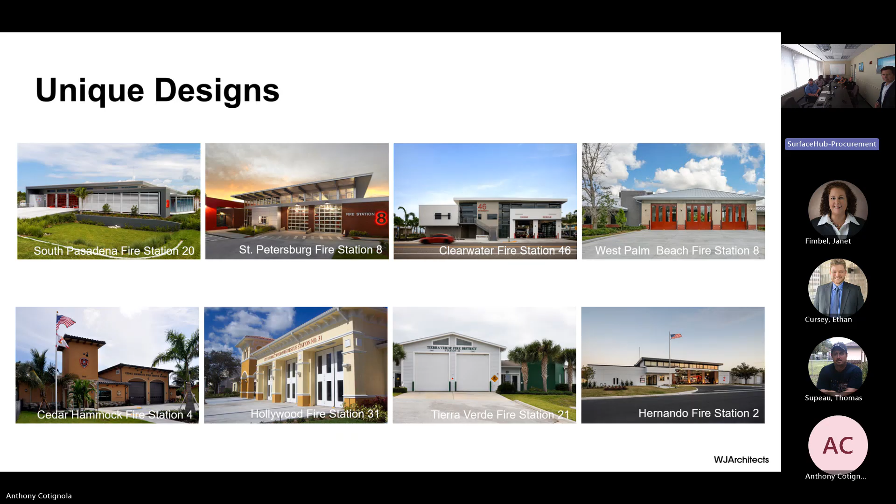From a LEED standpoint, unfortunately, LEED and resiliency tie together, and we've been tested recently. This is the Pasadena station that was used to launch boats during the last storm. And then we have Fire Station 46 directly on the beach - they were up and running about 3 hours after the stormwater receded.

They called it the Community Rock. We did one of the first LEED Platinum buildings in the state of Florida, and so many of our projects have gone for LEED, Green Globes, etc. We take pride in the building actually performing beyond LEED - LEED is just the base design, in my opinion. A building, if it really is sustainable, will look sustainable. The materials should not need to be painted; it should be low maintenance, which actually helps you guys out in the long run.

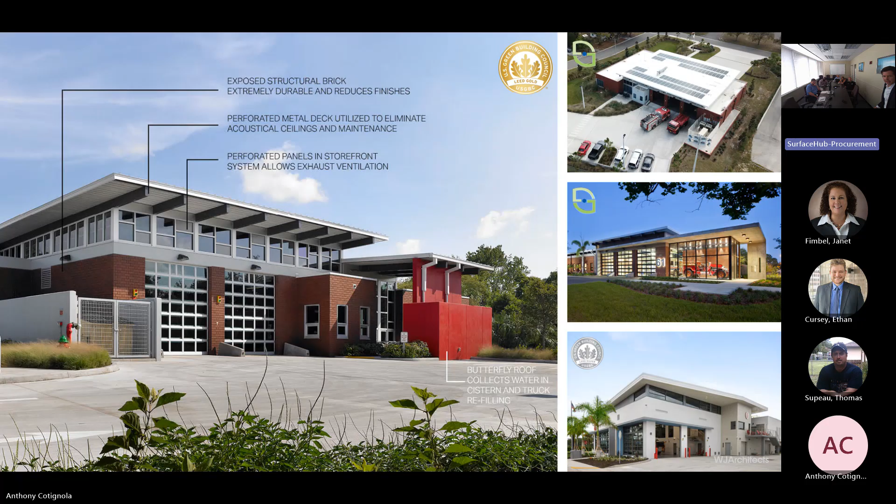Photovoltaics, we put those on. Even this roof collects into a cistern, and then we're able to use that on site. All of the natural light in the facility means you really don't have to turn the lights on during the daytime, and we just control that within the dorm rooms.

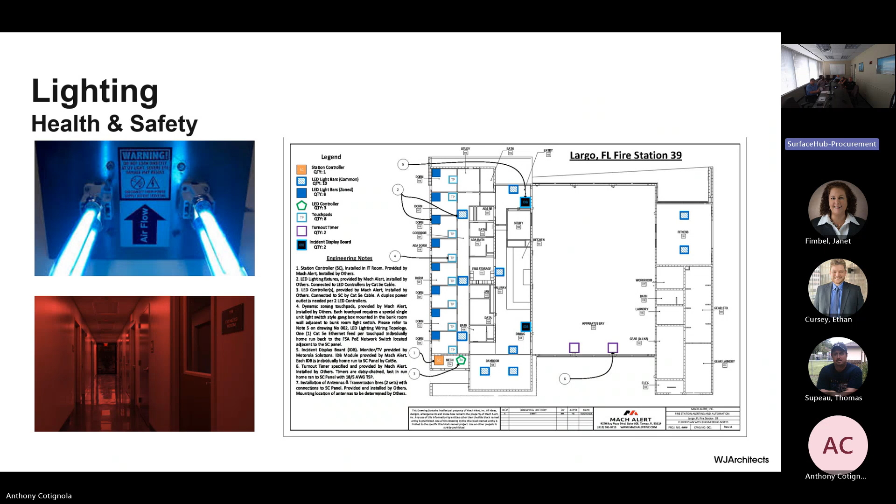Just as important as lighting, we approach it in a lot of different ways, both from Mach Alert or Phoenix or Locution alerting systems. We've used most of them throughout the state, depending on the municipality. But also for health and safety, we like to incorporate UV lighting in the ducts to help kill any airborne bacteria and mold, as well as lighting that adjusts to the eyes of the firefighters. So when they do get a call at night, they're not blinded by light, and it helps with sleep deprivation, as well as no one tripping on things when they're going to the apparatus. So we think of the whole buildup from alert, building up all of the lighting systems as you go in.

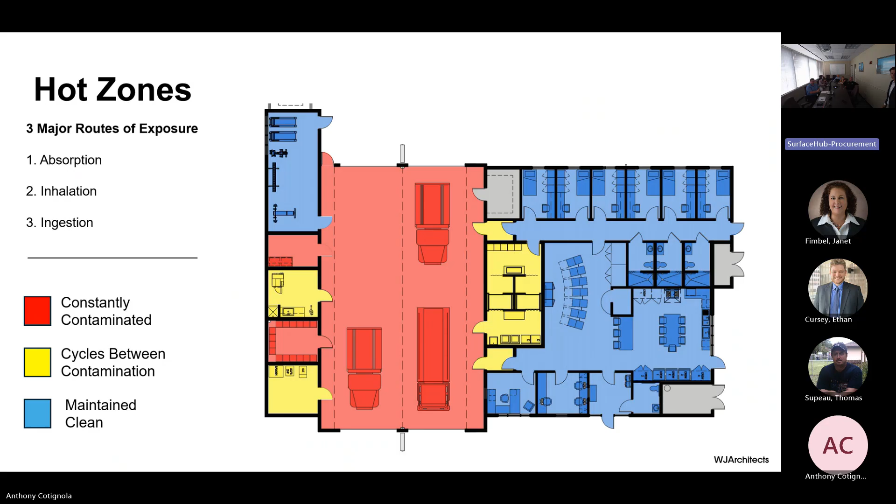Zone design, cancer prevention is huge now. We are starting to realize that you have to separate contaminated areas from living areas. To do that, we've started to implement vestibules, airlocks, and decontamination routes in and out of the clean spaces to the contaminated spaces. So you see the red would be constantly contaminated, yellow would be cycled between and cleaned, and that would help keep all your living spaces clean and free of toxins.

Zooming in on that, here's just a snapshot of some of the materials we use. We've implemented successfully the SpectraGlaze ceramic face CMU, which actually cuts money on install because they adhere the ceramic to the CMU and then install it all at once and basically just grout over it. Very nice looking, and you don't have to paint or seal it.

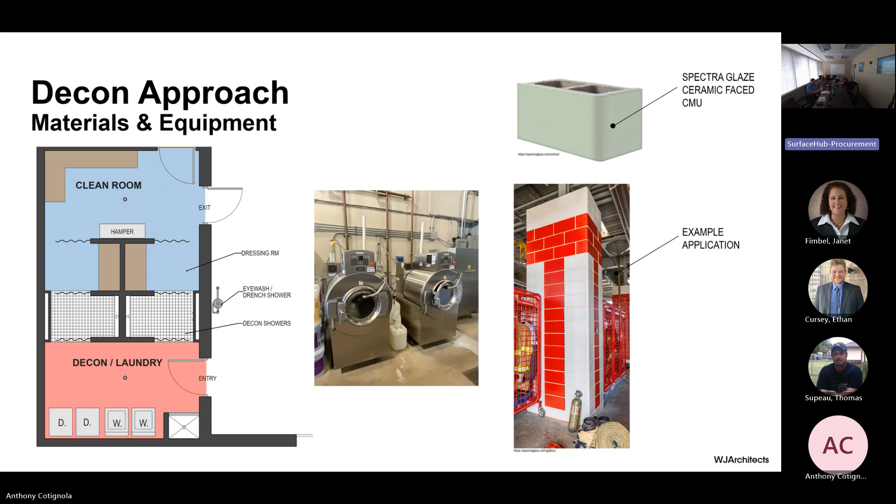Extractors we put in just about every station, so we're very versed in those. And then this is kind of a zoom in of that decon route, where you have these separate showers where you can move through to a clean area before you enter into living spaces with food, clean and everything else, to make sure you keep these separate areas.

Materiality also huge. We like to make sure it's maintainable so your guys can do other things more important, like training. So yeah, how many ceiling tiles have you replaced?

Right, we don't like to use drop ceilings if we don't have to. We use this Epicore deck, or different types - this is the name brand, but it is what you see. It's structural, plus it has an acoustic performance element to it, and we can use it in the apparatus bay or in the living spaces.

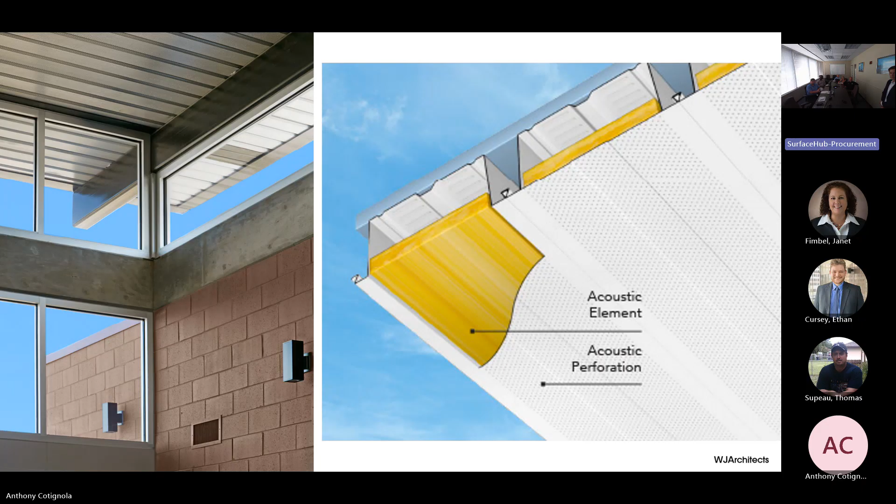You can see we have a CMU brick unit that doesn't need to be painted. We did go visit Station 45 - we saw that reference when we did some research. We wanted to see some of your other stations to make sure we were keeping up with what your standards are, so we took a tour. Very nice gentlemen, they showed us around. We just did kind of a comparison to that and what we're doing now.

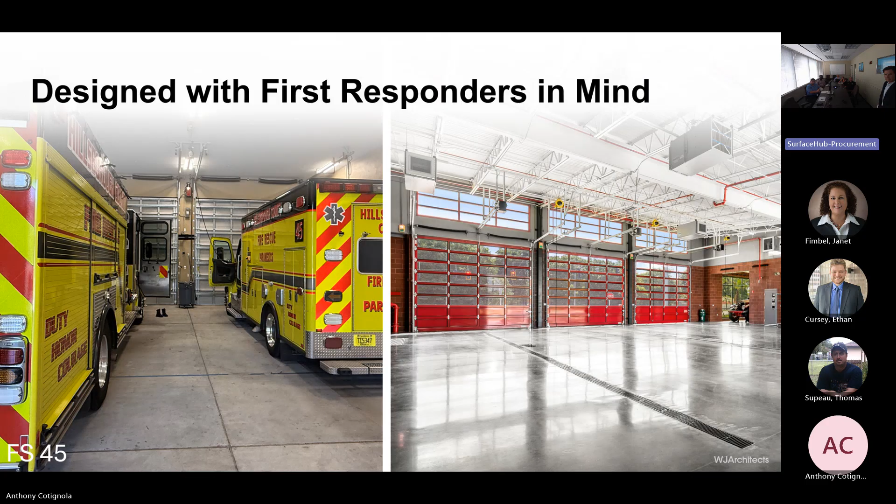We noticed we typically like to do the trench drains. It's a little better for collecting, and then you don't have as many slopes to worry about. Polishing it also is much easier to clean than trying to clean a broom finished surface. We've found that it's been very successful in the current stations.

We also have the air hog exhaust removal system, and we can talk a little bit more. Right, there's a kind of example too.

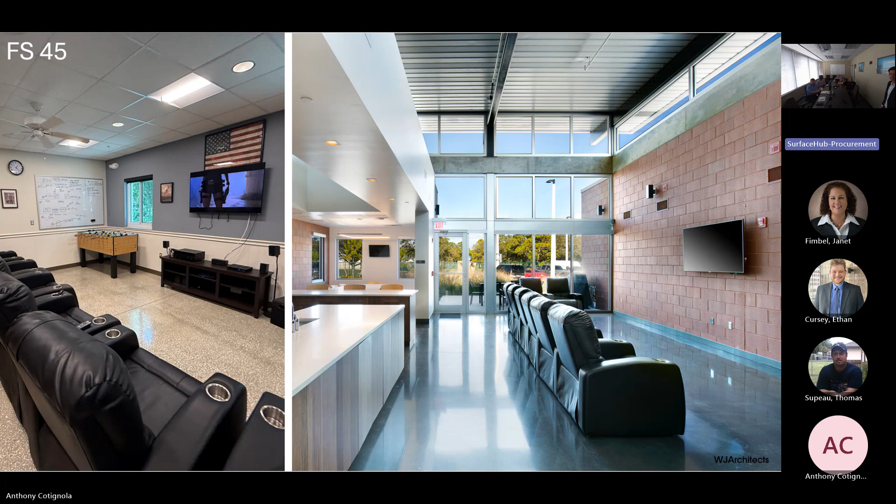Basically, if you go back to one of these stations, it's not changing - ten years later, it still looks the same. It's just an example of how we do our interior spaces. This is the kitchen, a very used spot. Again, very clean, polished concrete with quartz.

Next is Clearwater. You can see how we do our pantries - we like to put everything in a lockable pantry, including the refrigerator. That way it also cleans up your space a lot. But we all know firefighters will share food - they won't take anything else, obviously, but food's up for grabs.

As an example of our dorms, same kind of concept, same materiality. We have that brick wall exposed, so you don't have to paint that as well.

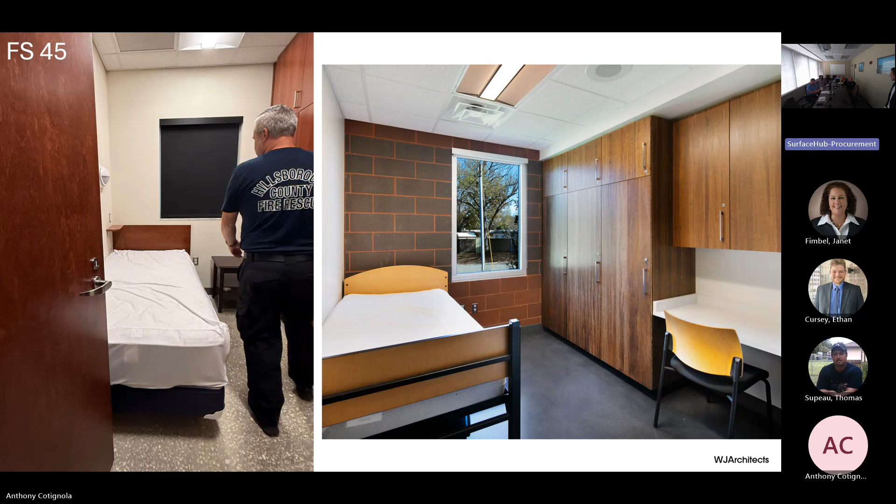Even the space underneath the bed has 3 drawers for additional storage.

Here's one of our bathrooms in Pasadena that we did. We like to do floor to ceiling tile, and our cost per square foot remains the same. It looks expensive, but it's really not, we have tons of reps we go through. You can actually have a hose bib in it and hose down the whole thing because it's just all tile and concrete.

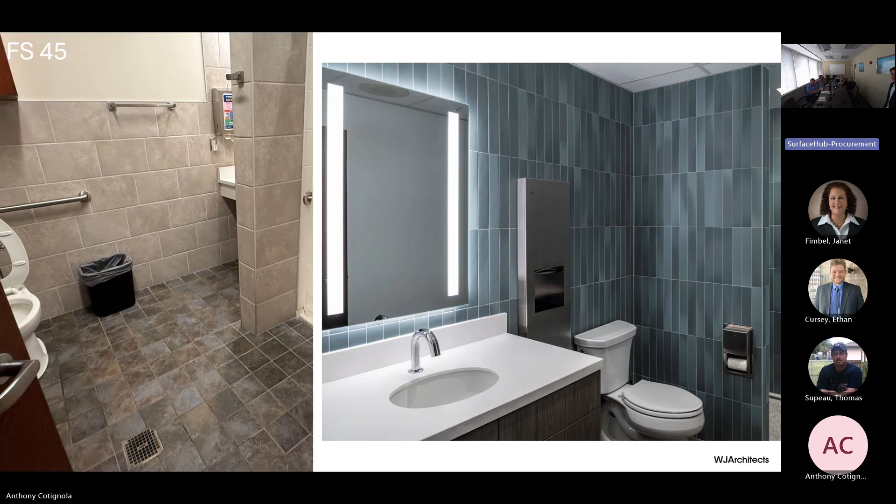But comparable sizes, we just want to show the difference between the two. Here's that spectrum glazed tile I wanted to show you. And the EMS room and the storage with the workbench also.

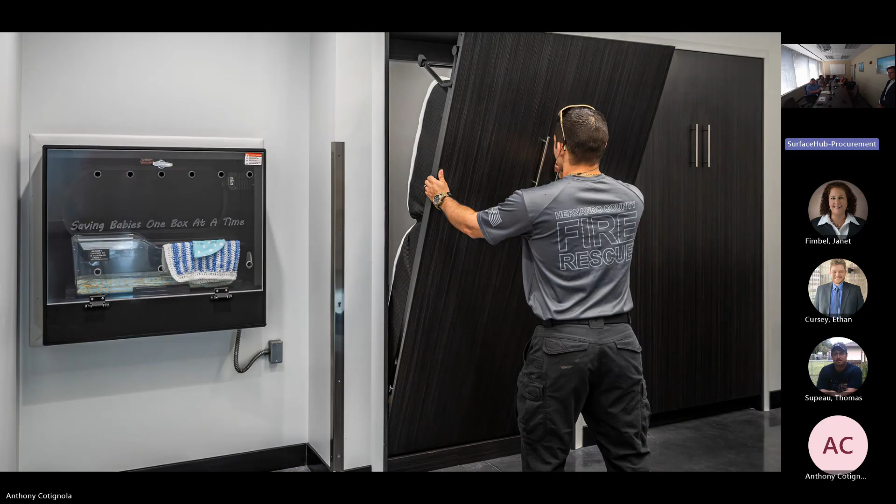One thing we noticed is that you had a safe place plaque on the outside, but we're one of the only firms to implement the Safe Haven baby boxes, with 2 stations right now and we're working on a 3rd. I know there's funding coming up for that, so we have a lot of experience with that, as well as talking to your guys. They said during the last storms, people had to come in on air mattresses, so we've also incorporated Murphy beds into different areas, so if you have excess personnel for a storm, they have a comfortable place to sleep.

So we kind of went overboard on your site. We wanted to see what we could do with it preliminarily, and we really wanted to see if we could get those pull-through bays for you, if it was even feasible. This is interesting, and I think our favorite, because it keeps your whole station operational during construction. You don't need temporary facilities while this is being constructed. This is assuming we have these two parcels, which I think you already have. Once this is done, we could demo and just transfer over.

Easy. We did a few more site plans, showing just the circulation. We would maintain this existing parking as much as possible, so we could save money with that. Once we demo, we just have to fill it in back here. Very tight, straight shots to the apparatus bay to meet that 90 second turnout time. And then we thought you could double load the EMS so you could exit both sides and have those extra bays.

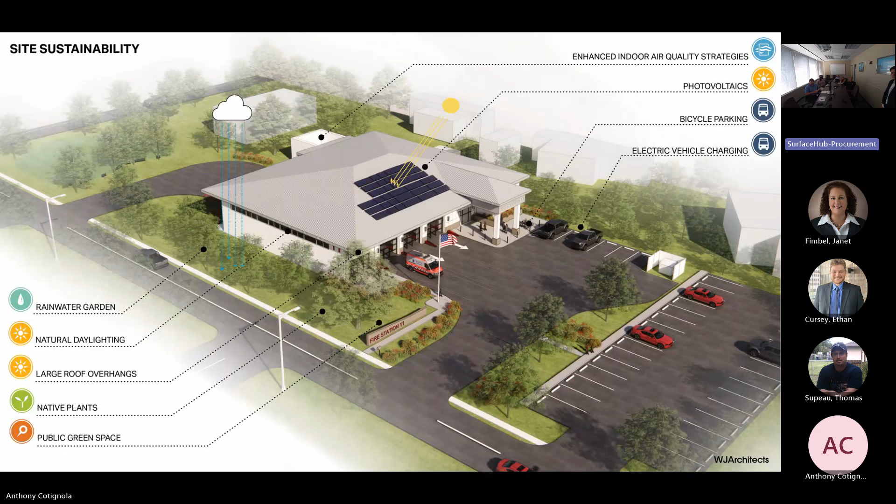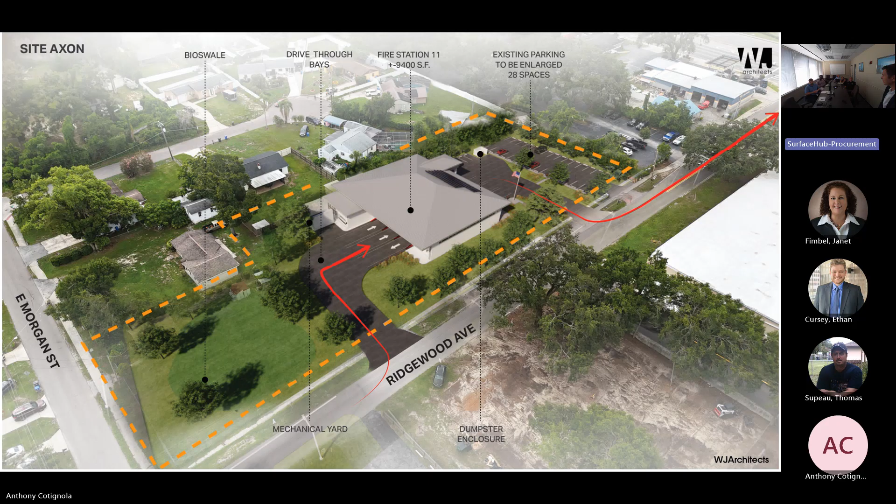And here, obviously we would work with you to develop an aesthetic, but this is just our first pass to show you some of the features as well as sustainable characteristics, where we could incorporate solar panels if the budget permitted, rain gardens, bioswales, electrical charging, enhanced air quality strategies for clean indoor space. It's just another diagram of how you would enter and exit in the context of the neighborhood, showing having this entire site and how you would go in and out. Even when you demo, you can use the one side during the site plan, once you demo this building, and just exit out of the opposite side.

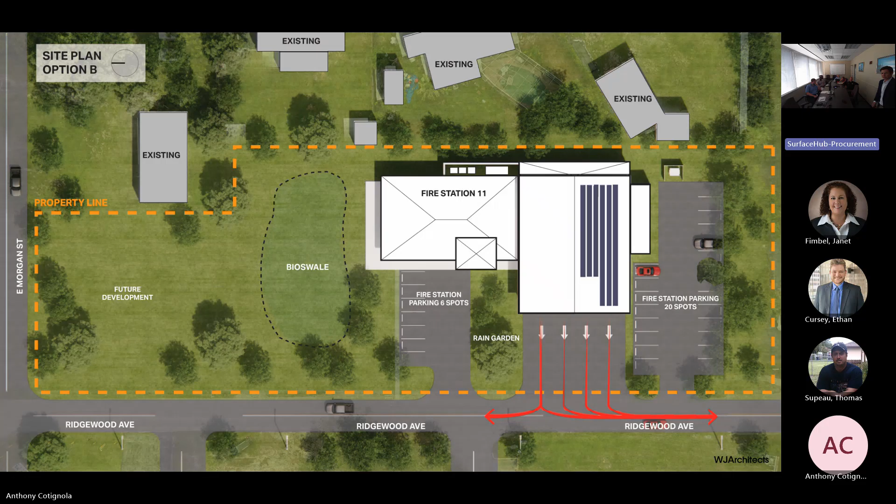But one thing we realized is that these bays are really tight, right? They shouldn't be that narrow. I'm sure you trust your guys, but not that much, right?

And the same similar floor plan, we just kind of rotated it. This is interesting because you have your dorms perpendicular to the bay, so you don't have any turns. Just a straight shot to the bay, which is usually the quickest route.

And it's very conservative on the site too. I think you have future development in the other parcels if we wanted to move the swale somewhere else.

We've done that multiple times. We did it for Clearwater and other things, so we could definitely help guide through that process.

But it is wider in that direction, and you already have some set structural beams there. Or we could probably get those 14-foot doors in there. We'd have to field verify, but we feel it's a viable option and the most cost effective.

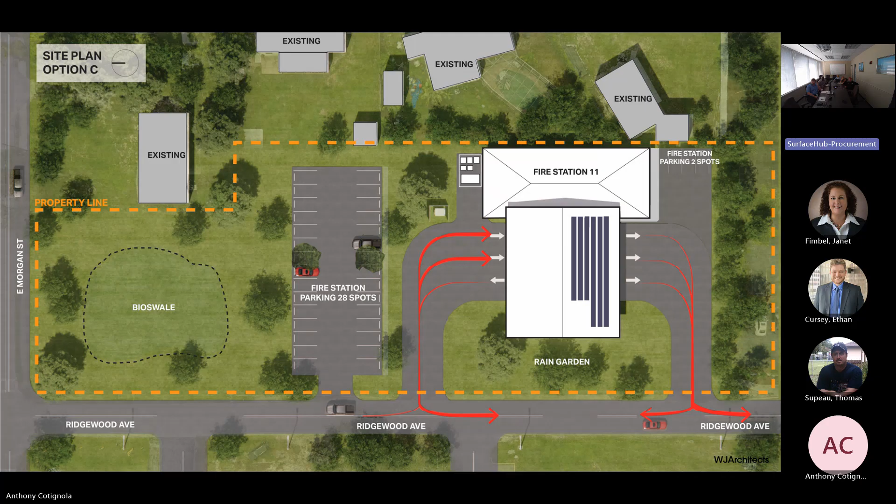And we could go through that later.

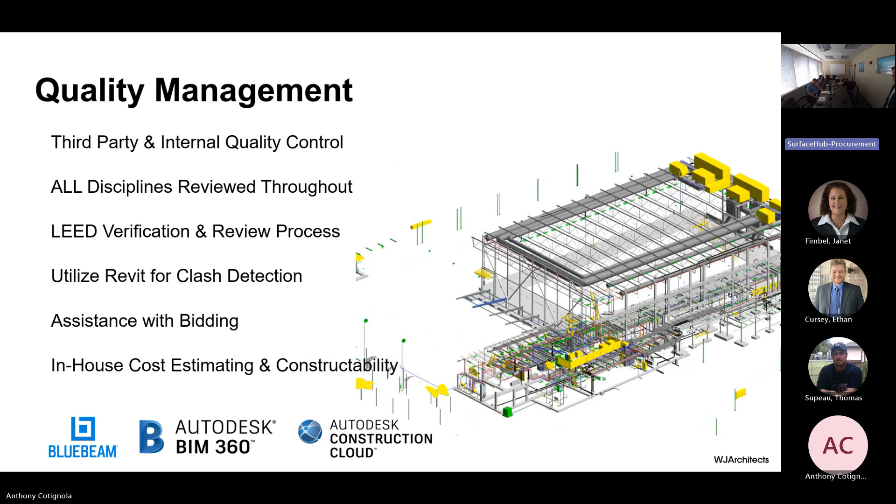So quality control, quality management is, I feel, where we really excel as a firm. I've been involved in this process on every project I've worked on at WJ. So we have a ton of strategies in place to make sure that we can deliver a product to you guys that is as free of errors and omissions as possible.

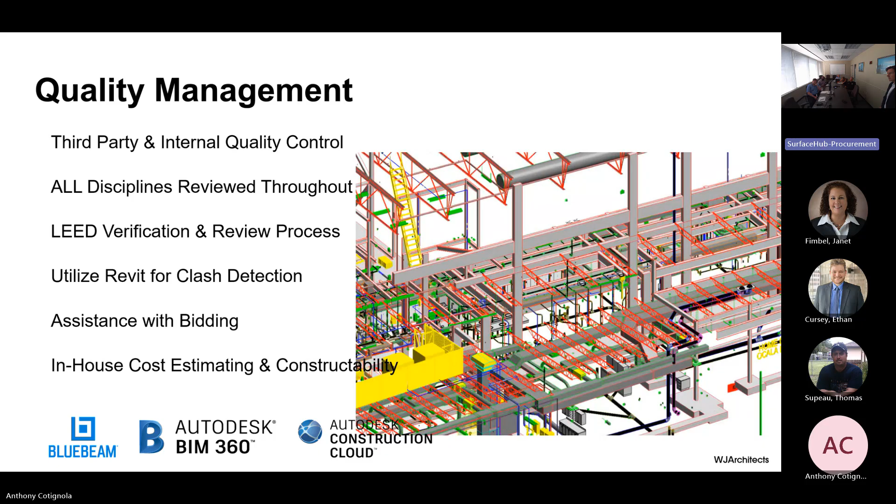So some of those involve third-party and internal quality control. We have a very in-depth quality control process at every phase, every deliverable, 30%, 60%, and 90%. And with that, we also lean on our in-house construction team to provide that construction expertise early on in the design process and throughout the design process.

And then we also use cloud sharing Revit models to make sure all the consultants and everyone in every discipline is on the same page.

Yes, so the proof of that is really how you deliver during construction. We track our projects, the last 25 projects. We're actually at a negative on the change order, because including tax savings, basically we're giving money back, and that's our goal on every project.

Budget, once we set a budget that is correct to your program, when we add that, we're at almost negative 9%. And we've had 10 hard bid projects with no change orders at all.

Yeah, so that's our goal for your project is to go in. We've done 80 stations. We have this down to be able to do that. So that is really proof in the pudding for this project.

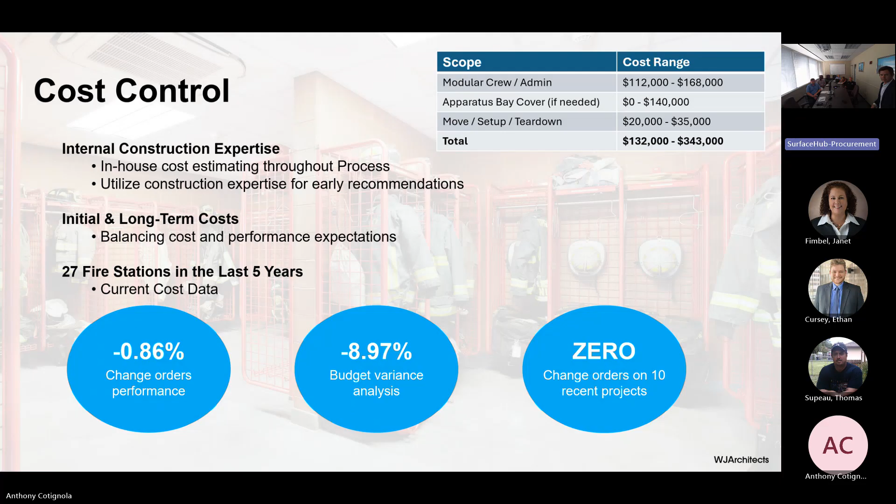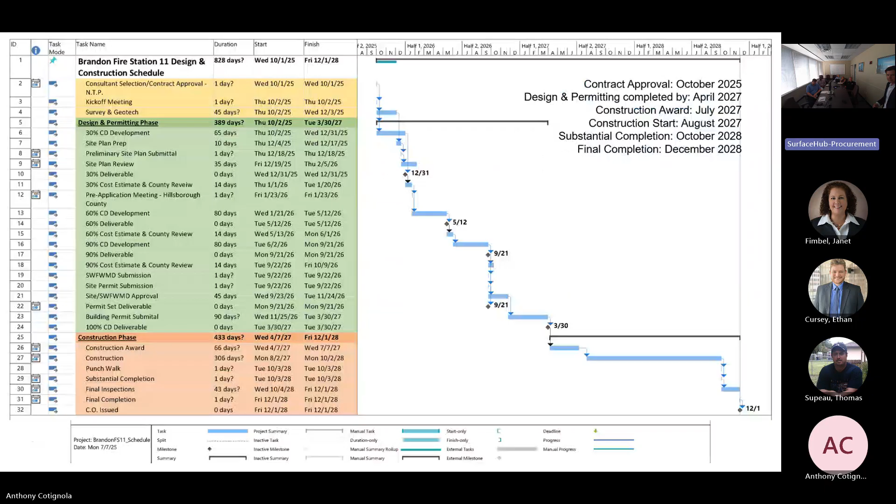So I know you probably already know this, but we have to go through the process, and we would do this type of process for everything that we do. So we can go over schedule if you'd like to, but for us, this is our passion. Public safety, fire stations, that is really our passion with this team to work on. We'd love the opportunity to prove ourselves.

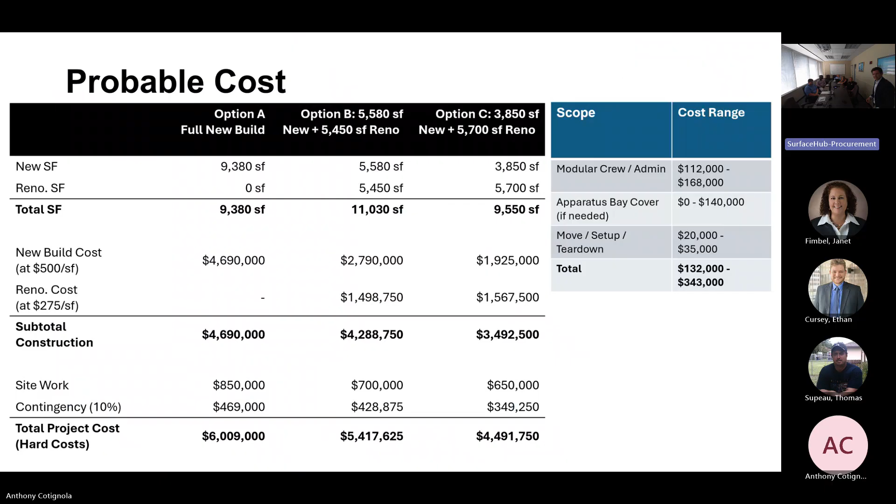I just want to repeat. What is the distance from the setback and the building from the property line? We have a 10-foot right here, and we're over that by about 12.5, I believe. And that's the other one, slammed all the way to the back.

What is the setback up from? Oh, this is the 25. Which I think it's 20. It limited how far out we could come, especially with the apparatus bay. So unfortunately, that one, maybe it's not — of course, we are not in design yet. But the problem is we have a buffering requirement of 20 feet between residential and the building. So that defeats the purpose right there.

And of course, the front setback is 25 or 30 feet, so we're already constrained on this one. I really like this concept, but unfortunately it's not going to work. The site is sloping from south to north, and having the parking on that side is going to be problematic too, because of drainage. So anyway, I like that concept, but I don't know how it's going to work for us.

If we can, I think we have some room. I think the 20-foot line was up here. Yeah, I think we do have some — maybe 5 feet if we need a 20-foot buffer, but we were considering it an issue either way because of the existing station being all on the line. So either way, even if we renovate, we're going to have that issue with the existing facility.

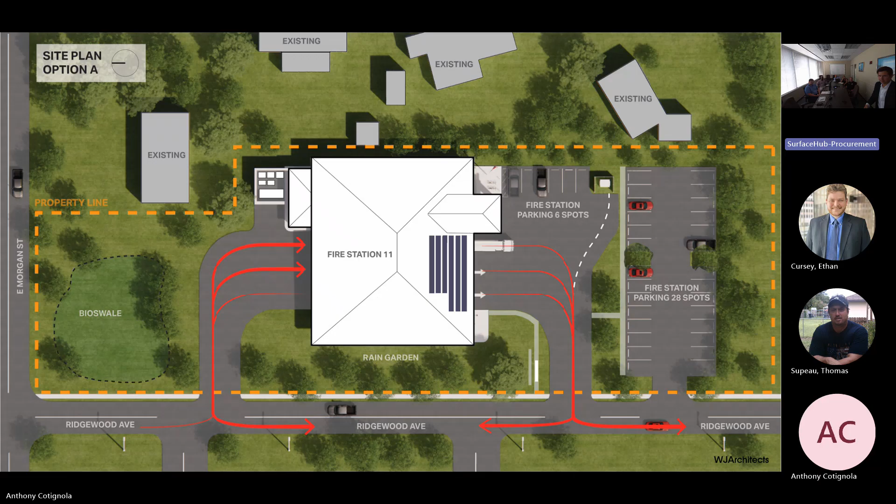So yeah, we have this one slide here, I think it's the first one. But we did run the auto turn with the worst case scenario for all of that.

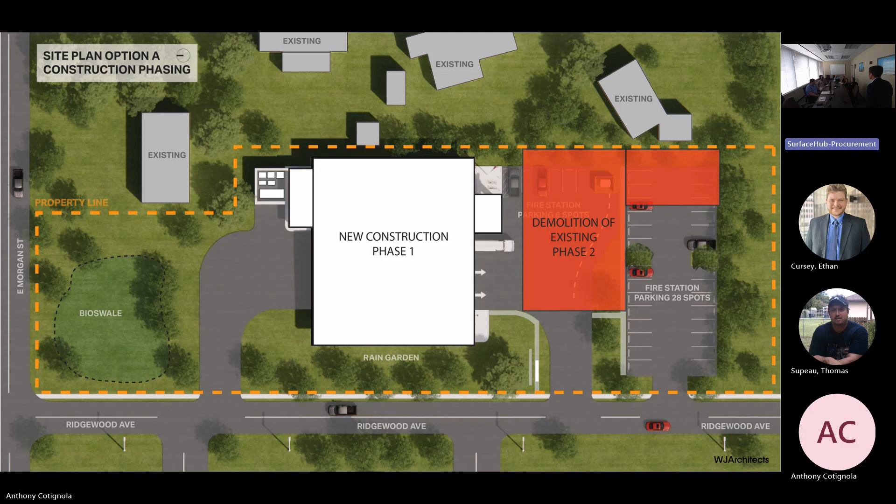So for scenario 2, if we were to keep the apparatus bay, I heard you say you think it's too narrow. Is there anything else you think would be problematic with keeping it? If you're going to keep the existing bays, I think you have two options. I don't think you can live with how narrow they are.

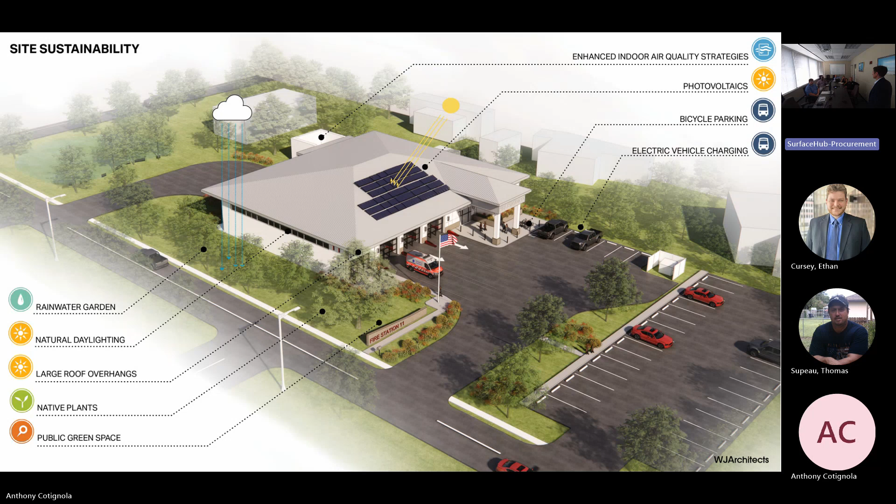They're built at 12 foot, and putting this much money into a station, you can't do that—hardening it isn't viable. So the final option I do believe is a viable one.

Right now you have some large clerestory windows on the sides there, and you have way more width in that direction to be able to accommodate that. So I think this is a very viable option.

The other secondary option we didn't even show, if you just wanted to keep a portion of the building, is essentially a flip-flop: do the living quarters in the existing apparatus bay, build up the living quarters, do a temporary apparatus bay, and then come back and build an appropriate apparatus bay, which could be head-on, next to it. So those are the two options if you really want to keep that bay intact or reuse some of it.

Can I go? No, go ahead, let's go back. So, spatial relationships and materiality—since they talk more about spatial relationships, I want to talk a bit about that. Chris always points out that fire stations get handled, right? They get manhandled.

So from your experience—I saw you showed an image of a fire station you did 10 years ago, and it seems like you pay a lot of attention to low maintenance and that sort of stuff—what cost impact does that have, and are you able to project life cycle costs based on that? Secondarily, you mentioned a lot about circulation and decontamination versus contaminated spaces, anterooms, and that sort of stuff, which adds square footage too. So how does all that play into the overall budget? I know you put out some budget numbers at the end—I just want to understand the impact.

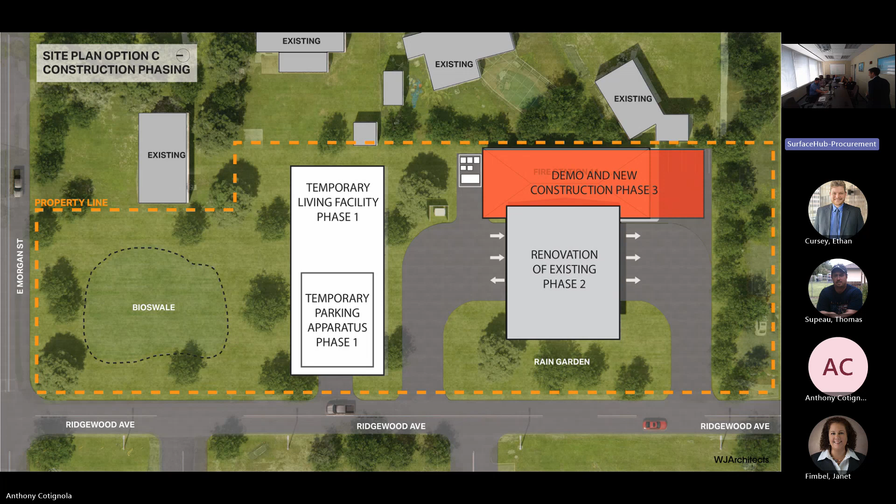Concluding. Now it's your turn. Thank you.